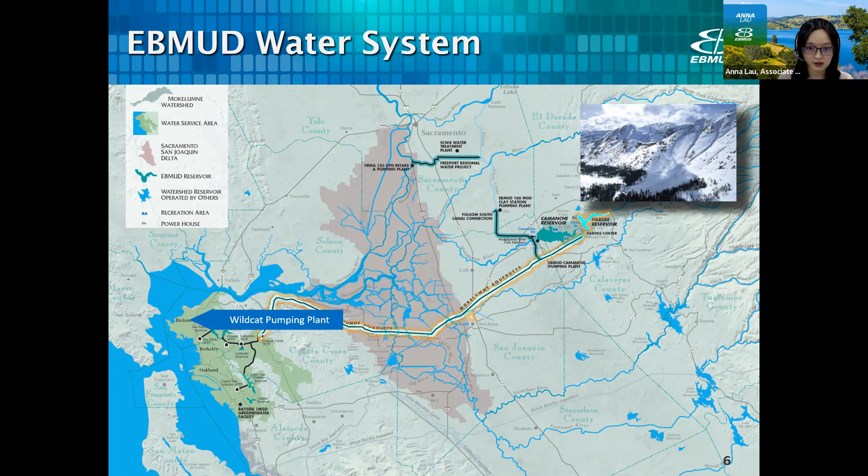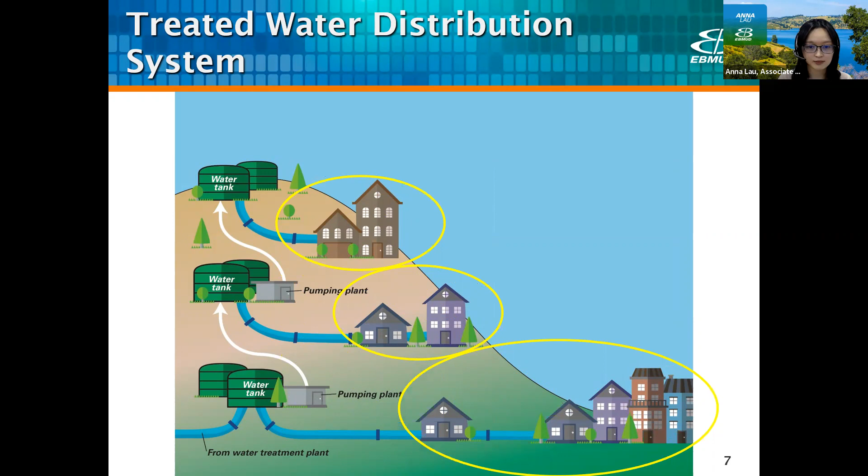The purpose of the Wildcat Pumping Plant is to increase the reliability of water service to a major portion of our western service area, spanning from Oakland to Crockett. It will also increase our transmission capacity from the Sobrante Water Treatment Plant, which is most critical when we're in a drought and during planned and unplanned facility outages.

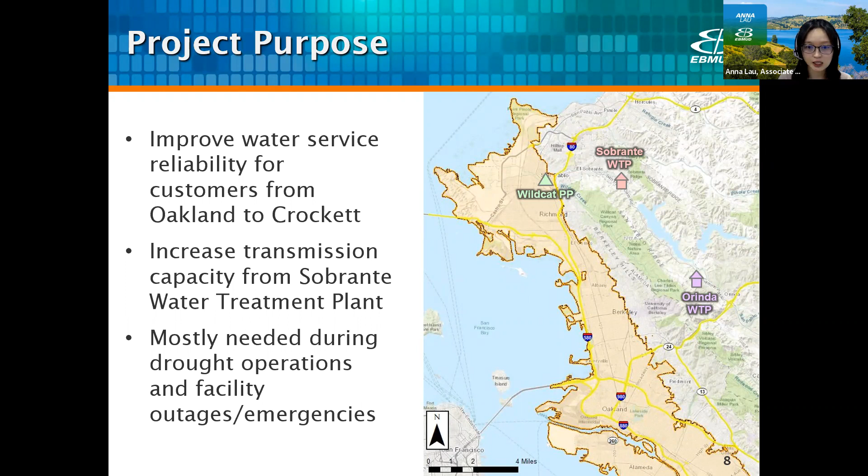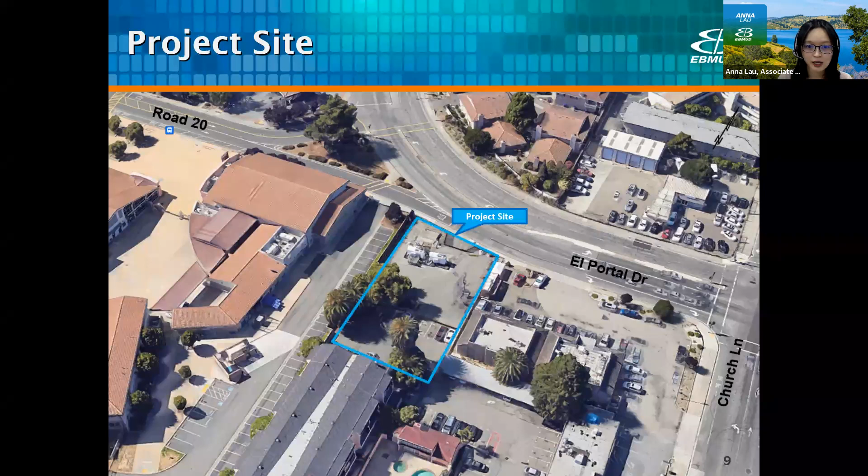Here is an overview of the project area. Our project site is located at the intersection of Road 20 and El Portal Drive. Road 20 is a 2-lane avenue that converges into a single-lane road before it merges into El Portal Drive. So Road 20, as you can see, is our only access to the project site.

The surrounding area is designated as mixed-use commercial. The site is bounded on the west by the Helms Middle School and on the east by a nail salon and a liquor store. There are apartments immediately to the south and some to the north of the project site.

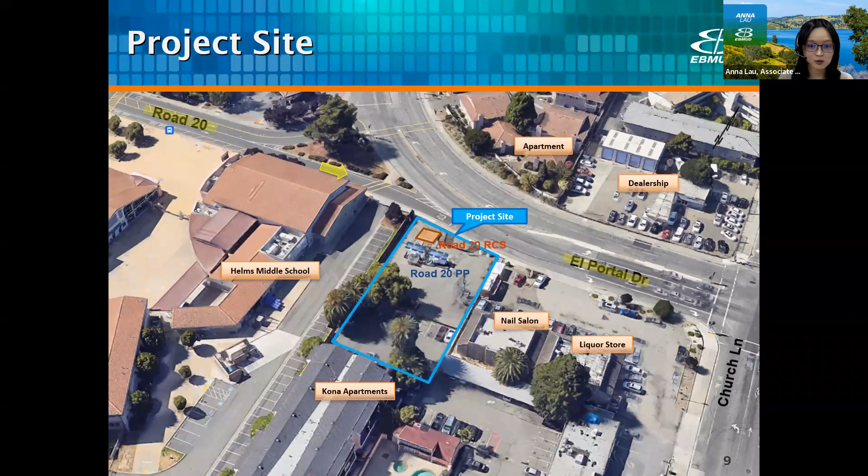Currently, the site contains our existing Road 20 rate control station, Road 20 portable pumps, and a parking lot in the back that has been leased to the apartments in the south. When the lease ends later in the year, we plan to extend the site to the south to accommodate our new pumping plant building.

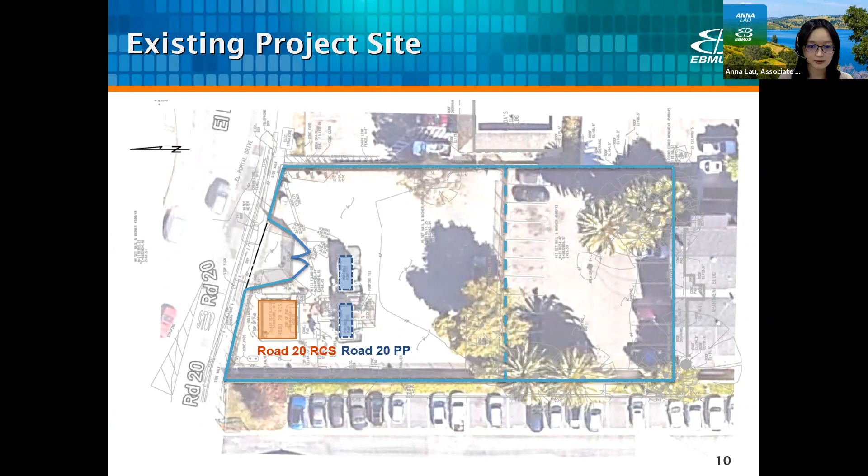This is again the existing project site in plan view, and north is to the left of the page along El Portal Drive. And here's our proposed site plan. I will briefly go over some key components of the site.

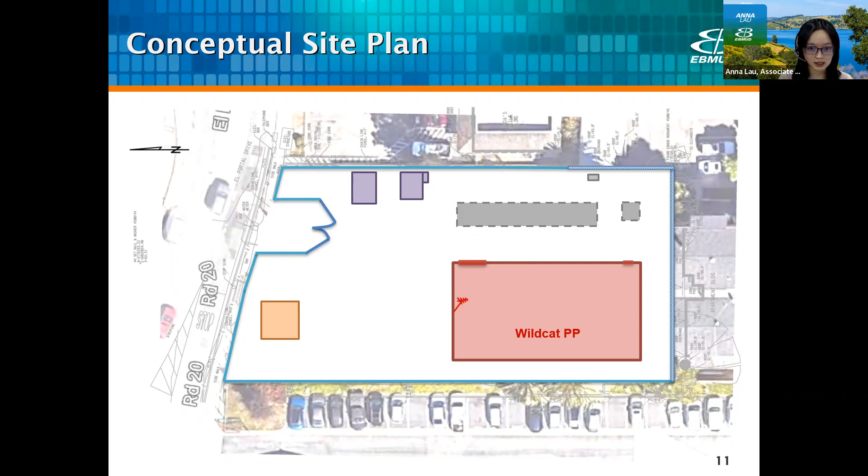First off, this is the pump station building. It's sized at about 40 by 80 feet to house pumps, motors, and electrical control panels. We're also space planning for an in-conduit hydroelectricity system within the building. There's an outdoor transformer and switchgear that provides power to the pumping plant. We will also have staging areas for emergency equipment such as a portable generator and portable pump.

The existing Road 20 rate control station will remain in place, but the existing Road 20 portable pumps will be removed once the new pumping plant is in place. To ensure that the site is secure, we will have standard security fencing on the north, east, and west perimeters of the site, similar to what's already there. On the south and southeast corner, we plan to install a CMU wall with barbed wires on top for security and aesthetics reasons.

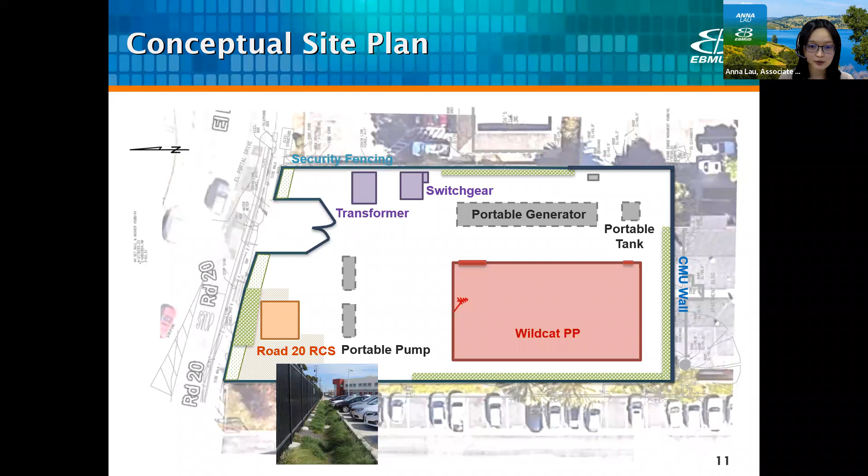In terms of landscaping, the site will incorporate C3 standards to promote infiltration and reduce runoff on site. We're achieving this by installing bioretention planters and landscaping strip shown in the green, as well as maintaining the pervious gravel area next to the rate control station. These green infrastructure are all connected by an underground drainage system, which goes out to a new storm drain in the street.

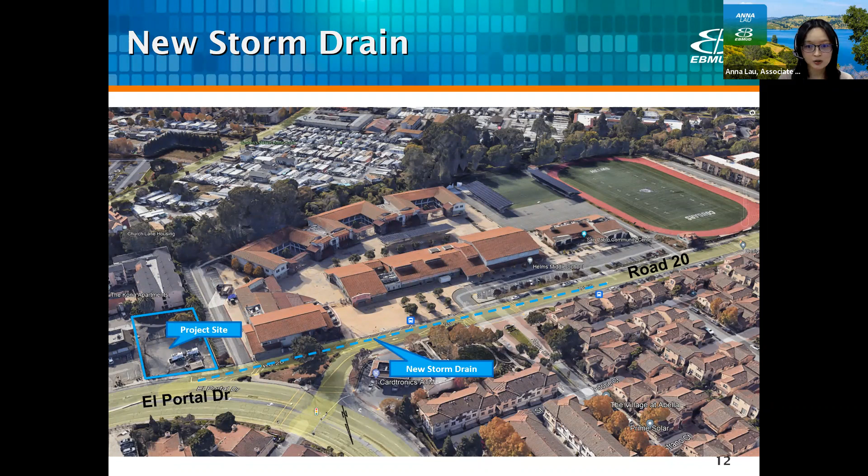So something like this. Here I'm showing another overview of the project area. This time, north is towards the bottom of the page. The blue outline is our project site, and the dashed line is the new storm drain pipeline that extends 725 feet to the west until it connects to an existing curb inlet. Construction of the storm drain is required to happen in the summer when school is not in session in order to minimize impacts related to traffic and noise.

EBMUD standard practices and procedures are designed to address typical characteristics of EBMUD's construction projects. Some key standard practices and procedures that apply to this project include project safety requirements, which includes provisions for public and construction worker safety, environmental requirements, which includes provisions related to water quality, dust and emission control, noise monitoring, and protection of biological and cultural resources.

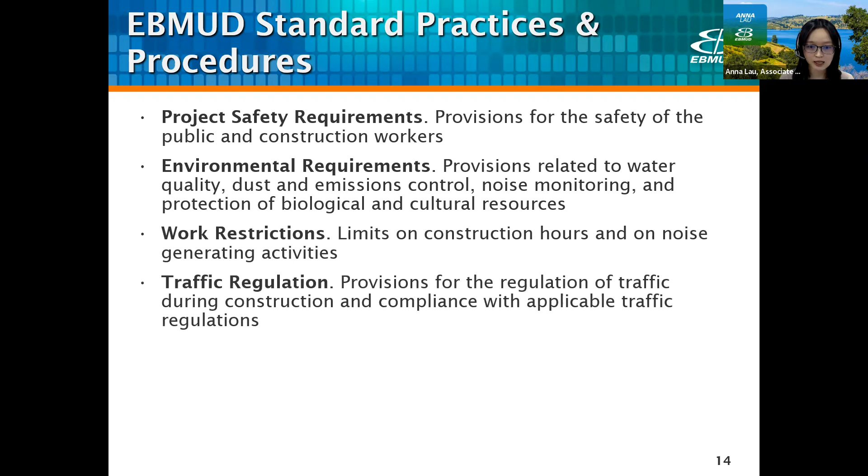Work restrictions adhere to the City of San Pablo's allowable working hours and restrict extreme noise generating activities to limited periods of the day. Traffic regulation includes requirements for the safe and efficient flow of traffic, including pedestrian and bike travel. And maintaining a clean site requires EBMUD's contractor to comply with local ordinances and anti-pollution laws and ensures the construction sites are kept free of waste.

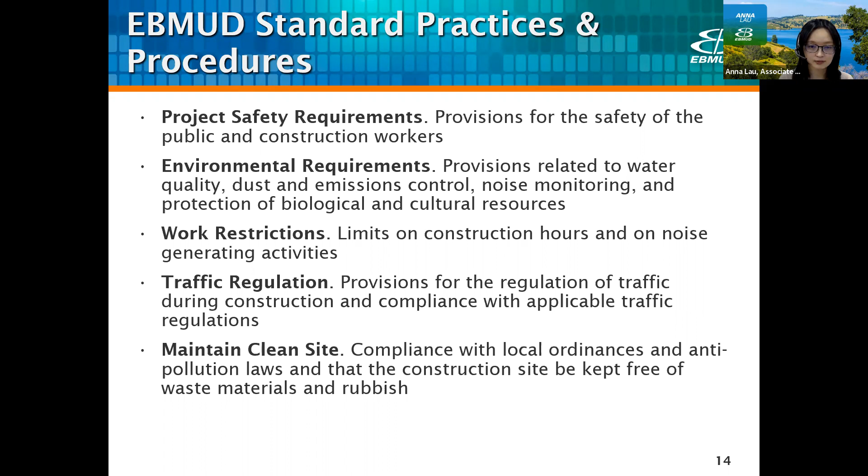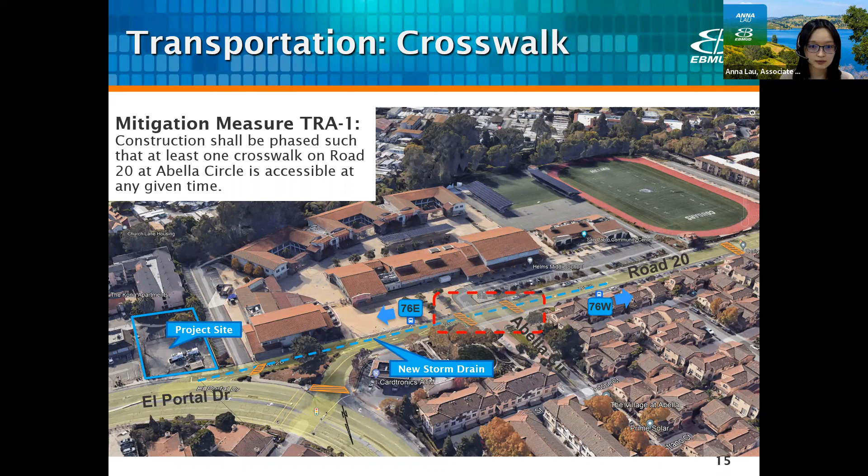The second mitigation has to do with this 300-foot through connection shown in the red that would need to be closed for about 4 days for construction along that segment and immediately to the east of it. To minimize impacts, EBMUD will be coordinating with the city and AC Transit to shift the center line of this adjacent bifurcation lane by about 4 feet so that any large vehicles, such as a bus, would have enough room to make a right turn.

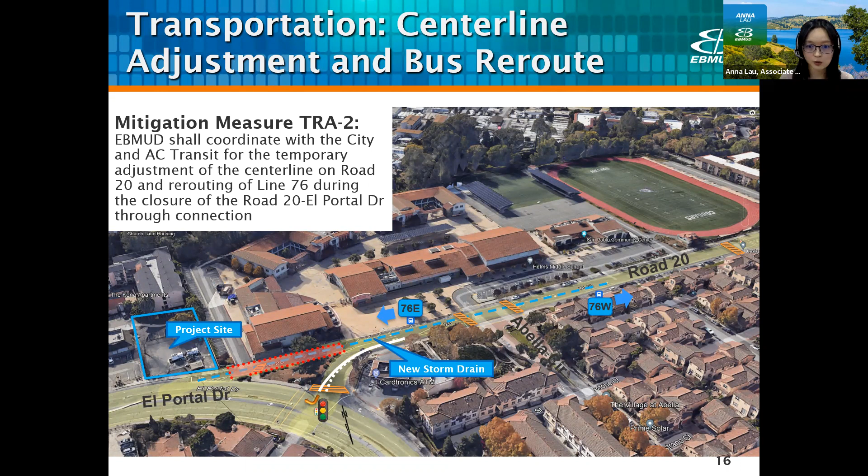The third mitigation has to do with construction in the area right in front of the bus stop. As a mitigation, EBMUD will coordinate with AC Transit to temporarily relocate the bus stop as needed.

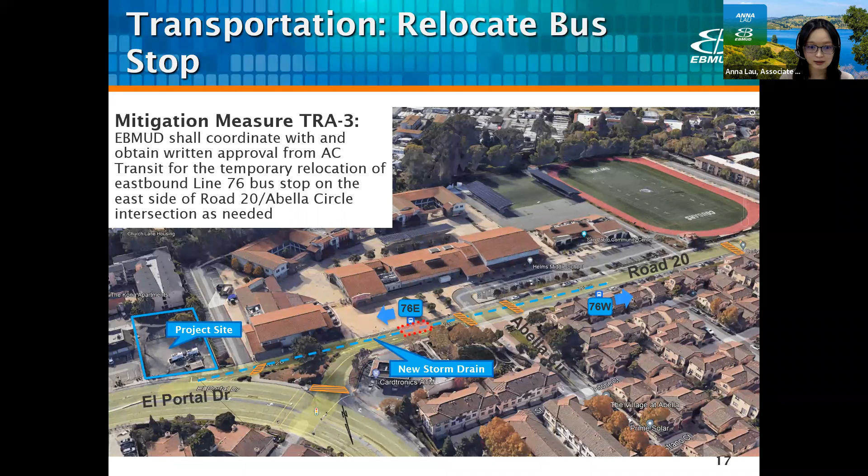Mitigation measure number 4 has to do with safety hazards near the school during high demand periods. And for this, EBMUD will be restricting construction truck travel to 30 minutes before and 30 minutes after morning and afternoon school bell times.

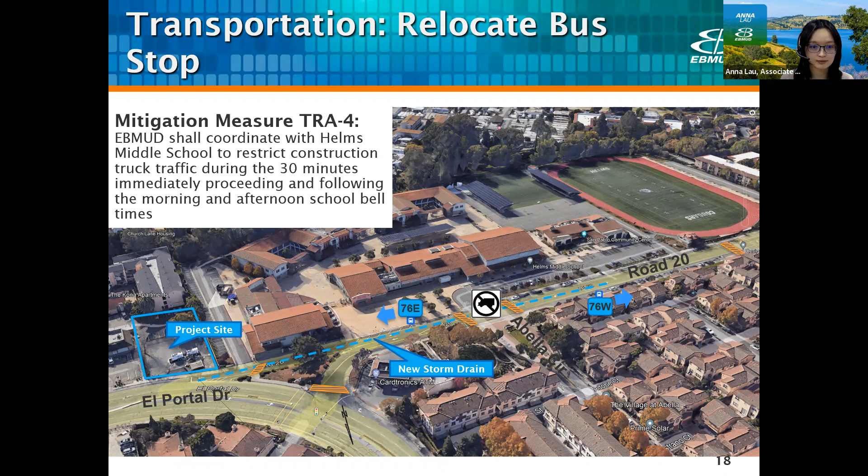Schedule-wise, the draft MND was published on January 12th, which kickstarted the 30-day review period. Today, we're holding the public meeting to present the MND. All comments received during the public review period will be incorporated into the final MND, and the project would be considered for board approval in June 2023.

Once the board approves the project, design will begin immediately in the latter half of 2023 and is expected to take 18 to 24 months. Construction would follow in the year 2026 and is estimated to take 2 years.

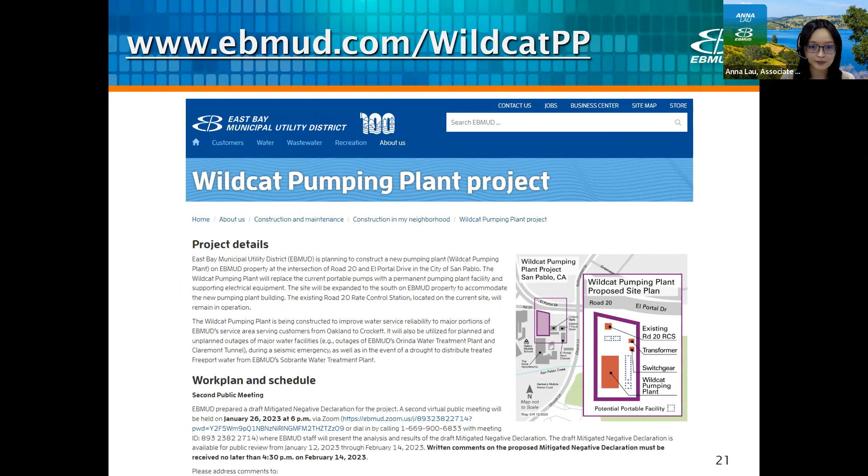The MND is not only available online, but you will also be able to view it in hard copy form at the San Pablo Public Library and by appointment at EBMUD's Administration Building, located at 375 11th Street in Oakland. Draft MND comments are due by 4:30 p.m. on Tuesday, February 14, 2023.

All right, thank you, Anna. I have gone and allowed the people to unmute themselves if they want to ask any questions, or perhaps put them in the chat. I'm going to make sure that people can ask their questions if they would like to. And let me see. So I have asked everyone to unmute. So do you have any questions about the project for the engineering team?